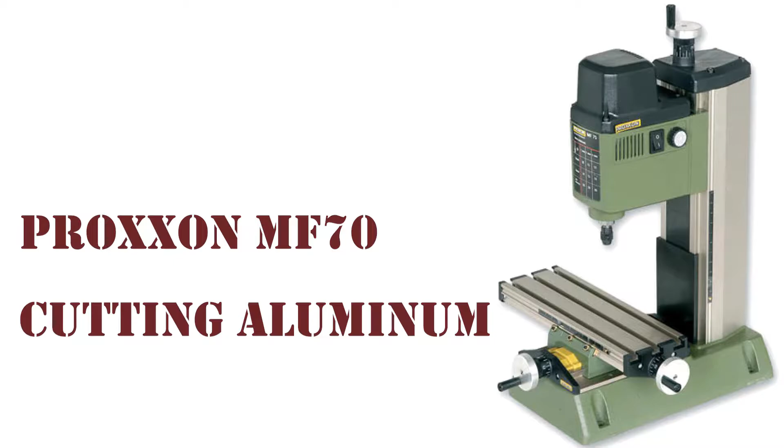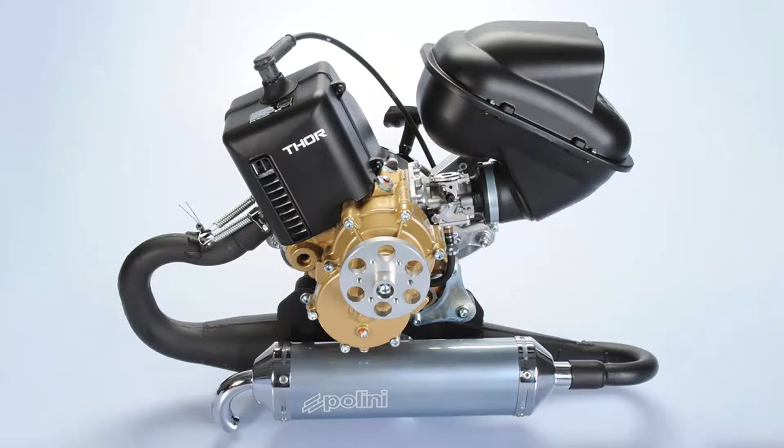At last! This is the episode where we finally get to see the Proxxon in action, cutting some aluminum. Nothing exceedingly difficult, just some contours on 2mm aluminum sheet. This is part of a modification which I've done to my paramotor. We are going to talk a bit more about paramotors at some point. For the time being, it's a Polini Thor 100 and it has some notorious problems with its manual start.

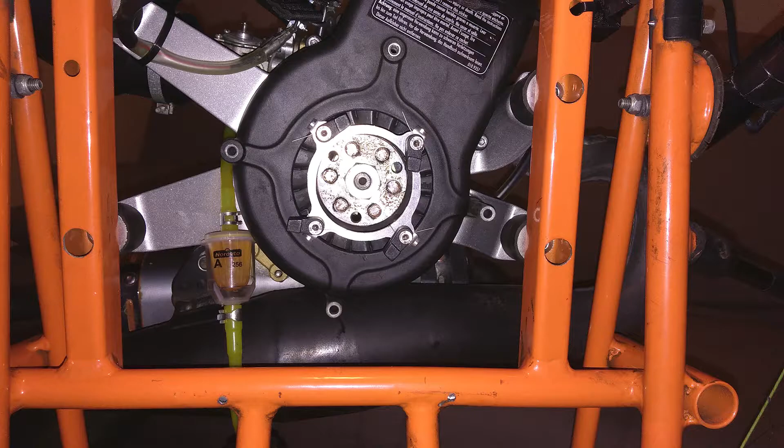This plate is just one of the parts needed for this modification. It is mounted on the engine and it holds the poles in place. The other parts are either 3D printed or bought off the shelf. But that's another story for another time. Anyways, back to our milling project.

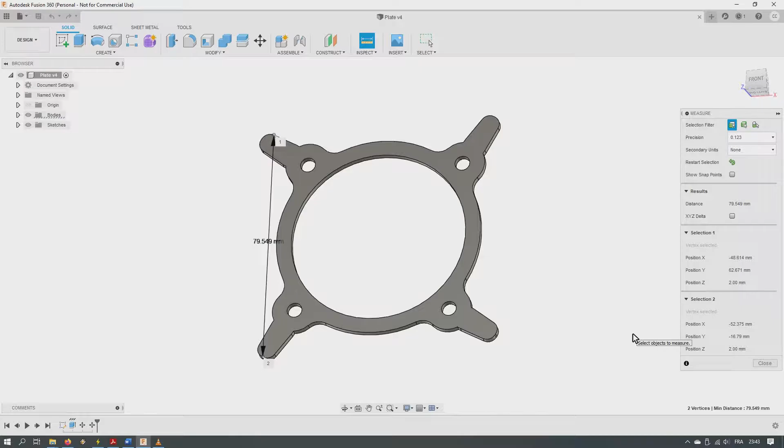This is the part in CAD and, with all the yapping about the enlarged working area and wide travel, it still doesn't fit, so I'll have to do it in two operations. So here is half of the plate. I will first have to mill this half, then rotate the part 180 degrees and redo the same operations. Here's how I'm doing it with Fusion 360.

First, you need to go from your design workspace to manufacture. In here, the first thing to do is to create a setup. The setup will correspond to all the operations that you will make with the part held in the same position on your table. What I like to do here is go directly to the stock tab and define the stock.

The stock is the raw material at your disposal. In my case, this is just aluminum sheet. The offset will be 0 on the top and I'm also going to set it to 0 on the sides. Once I've done this, I have to come back to the Setup tab and choose the origin of my operations. Since I have to rotate the part after the first half is cut, I'm going to choose a point which is easy to reference. In my case, this point right here will be easy to visualize.

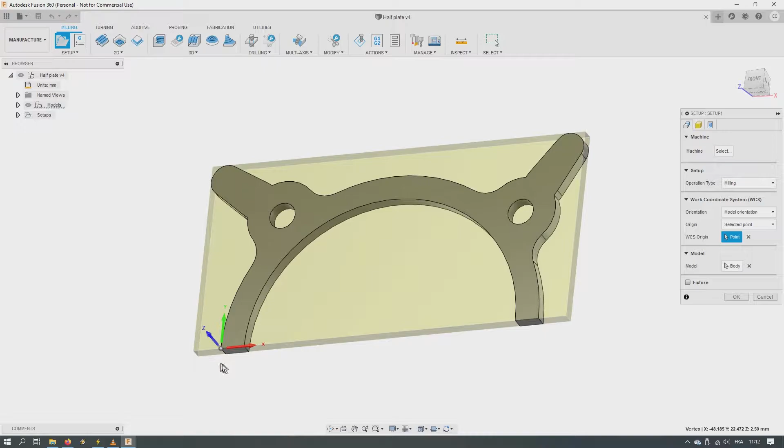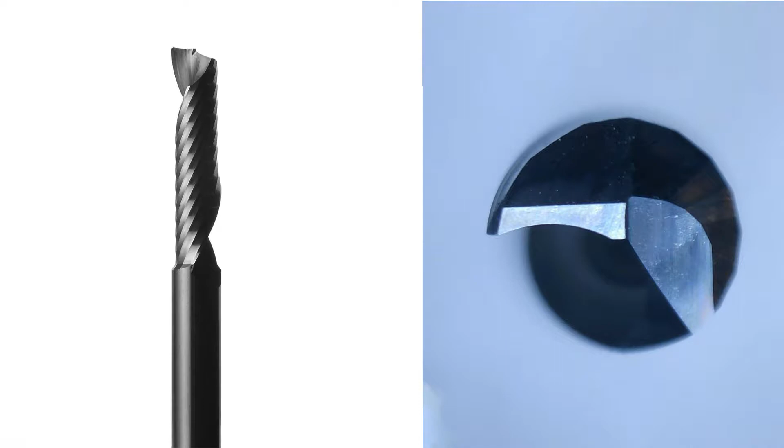Once the setup is defined, we can create our operations. For the part that I'm trying to make, we will use 2D contours. Here again, we have a dialog box with different tabs. First comes the tool. In my case, I'm using a single flute end mill, 2mm in diameter. From my rather limited experience, I found that single flute end mills seem to work better than 2, 3 or 4 flute designs. They seem to evacuate chips faster and stand a better chance at not getting gummed up.

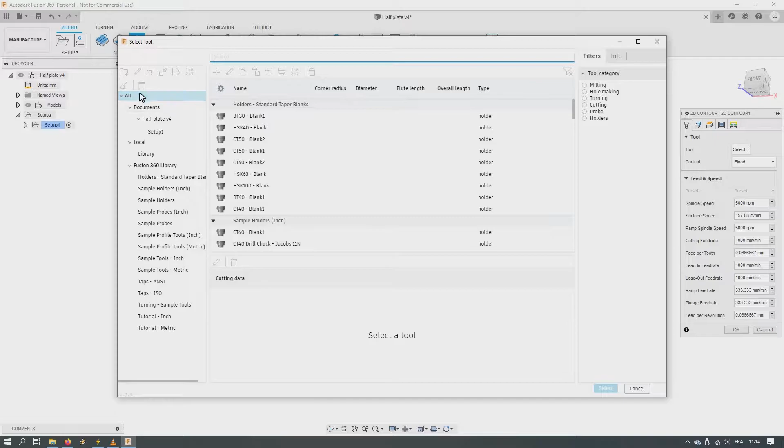In any case, we are going to have to set up our tool in the first tab. You can either choose from the existing libraries or create your own tool. I'm going to choose a flat end mill. The number of flutes is 1. The diameter is 2mm. Most of the cutting parameters are normally given by your end mill manufacturer, but if you don't have it, there's always the old method of trial and error, mostly error.

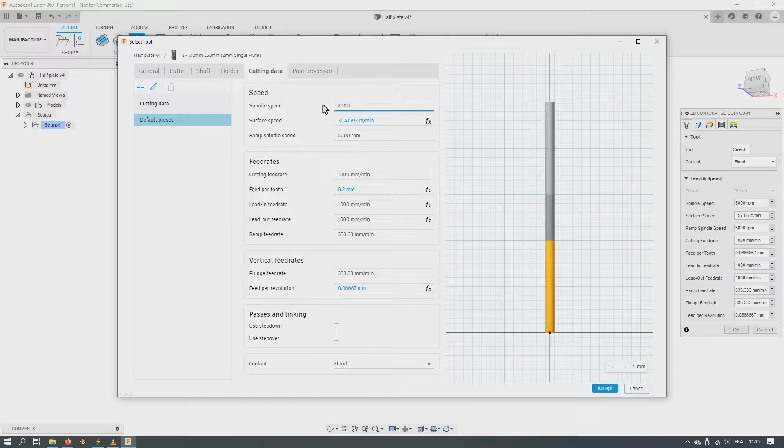In any case, here's what I have for mine. It says that for aluminum, you should use cutting fluid. Is air a fluid? Yes, I think it is. My chart doesn't even cover the 2mm end mill which they sold to me, but I'm going to extrapolate and use the maximum 20,000 RPM. To be honest, even without this chart, I was still going to use the maximum RPM of the machine.

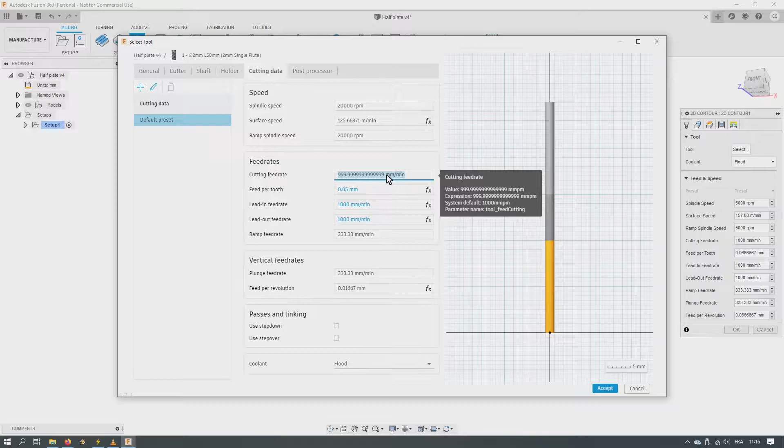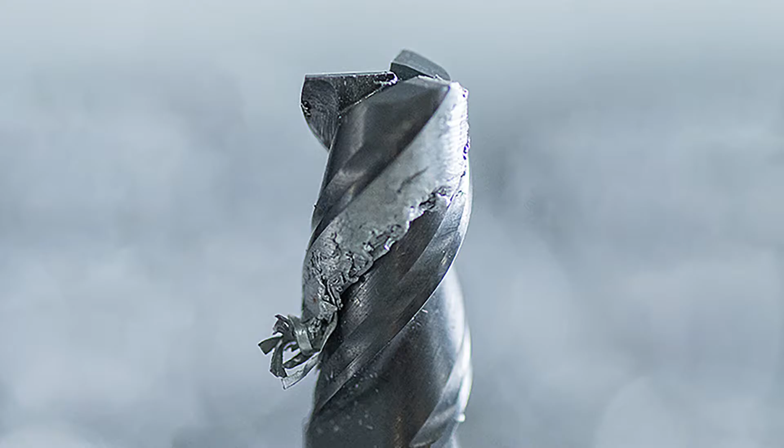Feed rate should be between 400 and 900 mm per minute. That's quite a wide range, but I don't think my stepper motors could handle that kind of speeds, so I'm going to go with a more conservative 250 mm per minute. In any case, too slow of a feed rate will end up in a lot of rub and gumming up of your end mills. The plunge rate should be between 10 and 20% of the horizontal feed rate, so I'm going to go with a minimum of 25 mm per minute.

The width of cut doesn't matter here, since we're basically slot milling, and the depth of cut will be defined later on in the operation. So we can click OK now for the tool and we can select it for our operation.

You can see the same parameters appear here in the dialog box once the tool is chosen. So, after not having respected a single parameter from the manufacturer's chart, onwards we go. The next thing to do is go to the Geometry tab and choose your contour. I'm going to do a first operation for the holes, then a second one for the basic contour. Normally, you can do them both in a single operation, but I want to give myself a bit of freedom to check the end mill between operations.

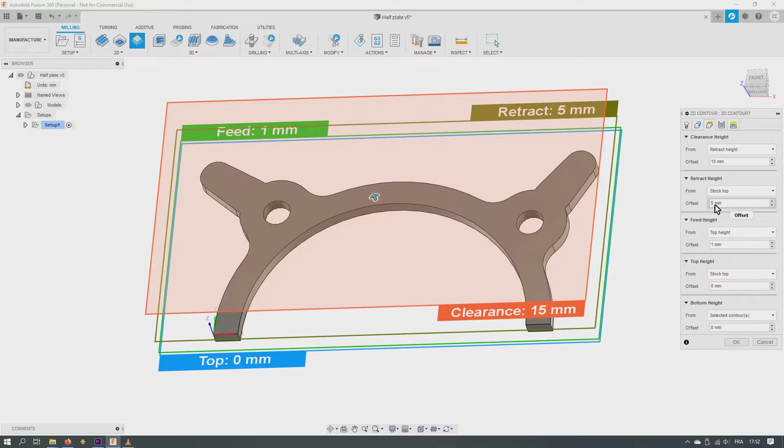The next tab is the Heights tab. Since I don't have any obstacles on my piece of aluminum sheet, I'm going to set all of these heights just above the stock top, but if you have fixtures or protruding fixtures in the middle of your piece, you might want to pay a little bit more attention to this part.

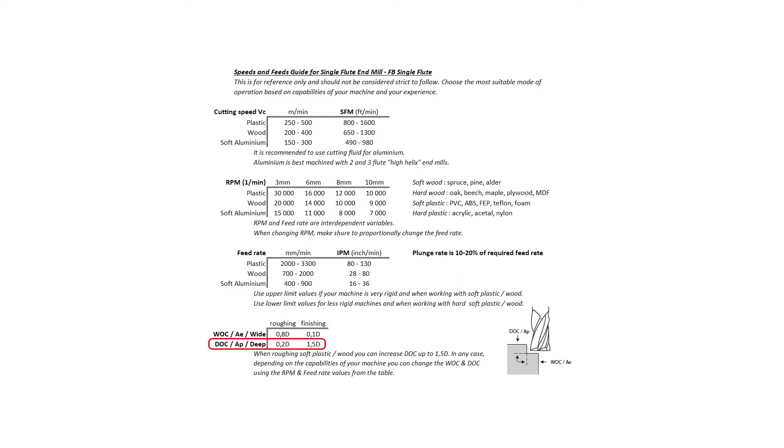Next, we go to the Passes tab. By default, Fusion will use the full depth of cut and do the whole operation in one pass. You need to check the multiple depths to use lighter passes. This is where we go back to the manufacturer's chart and see what other information we can ignore. Width of cut doesn't matter here since this is basically slot milling. The depth of cut, on the other hand, should be 0.2 of the diameter, so around 0.4 millimeters. But I'm going to be a real gentleman and go with 0.1 millimeters. I really don't want to push the machine too much.

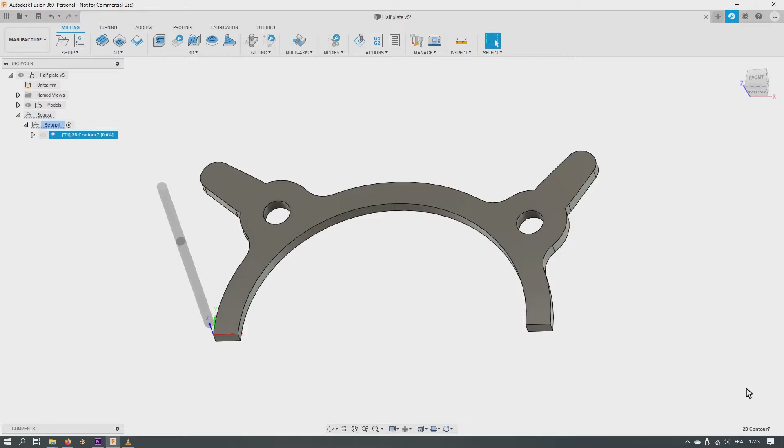The last tab is the linking tab, where you would set the linking between operations, but since I'm doing separate operations, I'm going to directly click on OK, which will signal Fusion to start generating the G-code. You can then save your G-code on your computer.

Time to do the final contour of the piece. Same tool. In my case, I don't want to do a full contour, since this is only half of the part. I will have to remove the two transitions from the interior to the exterior. The only way I found to do this is to select two different chains.

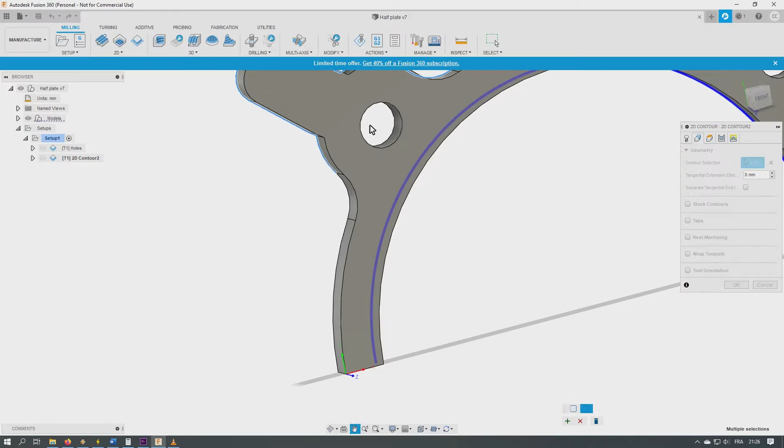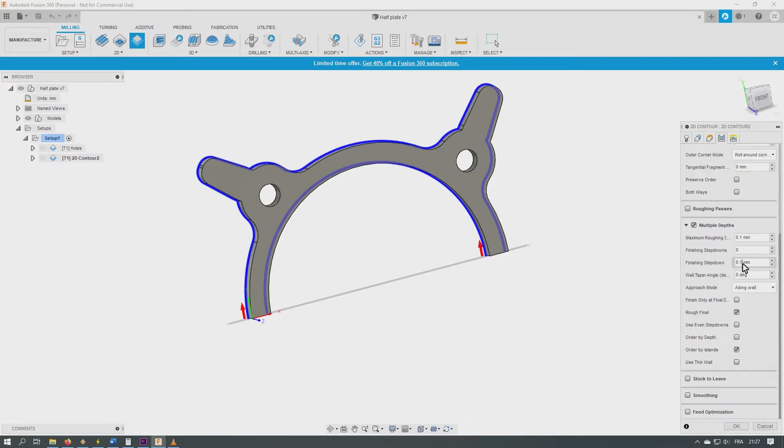I'm planning on gluing the metal sheet to a sacrificial piece of particle board, so I'm not using tabs. Otherwise, if you need to retain the part until the very end, you might want to use tabs, which you can remove afterwards. Same heights, same depths of cut as before, and let it compute. And here is the toolpath which has been generated.

Right, so this is one last thing I like to do before sending the files to the machine. I don't know why, but for the first rapid, Fusion will send the machine to its starting point without lifting it. You can see here in the first G0 cycle, there's only X and Y, which might drag the tool on the surface of your part if it's not absolutely flat. So what I like to do is invert these two first lines and save the file afterwards.

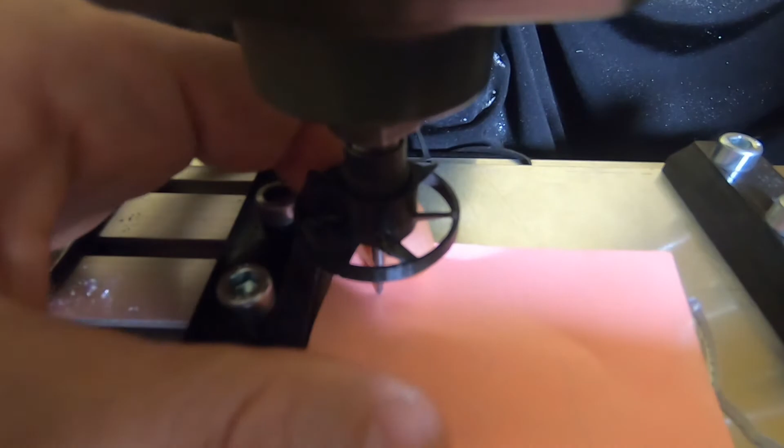Here is the metal sheet in the machine. I had to draw a line to be able to flip the part and reference a perfect Y-axis. No fancy probe for me, just the old piece of paper trick for setting the origin in Z.

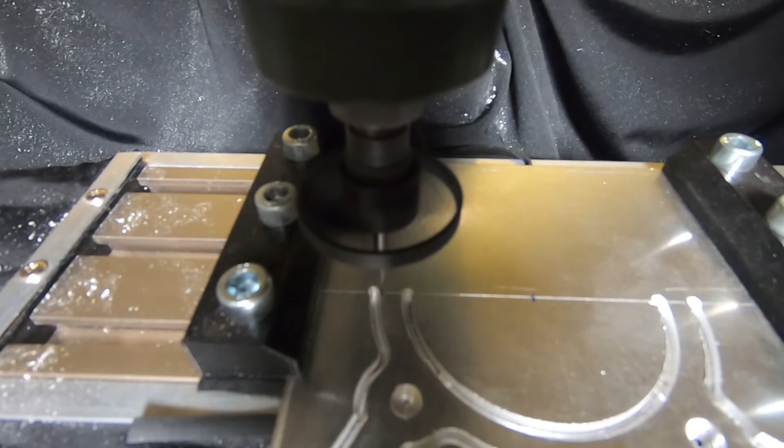I'm sorry for the crappy focus, I didn't notice it while filming. I was aiming for more of an eye candy kind of experience, but I missed. Problem is that I filmed the next video with the same setup, so the next one will be crap as well. Hope to do better for the ones to follow.

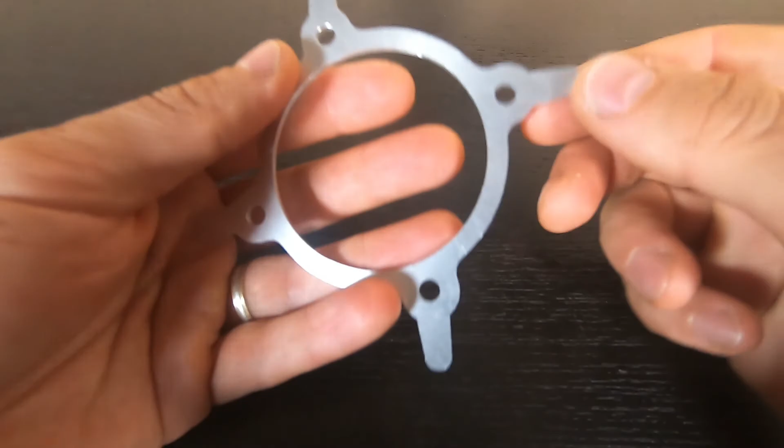Anyway, here is the part. It looks okay for me. The cut is really clean, no wobble there. The holes are round, so no sign of backlash.